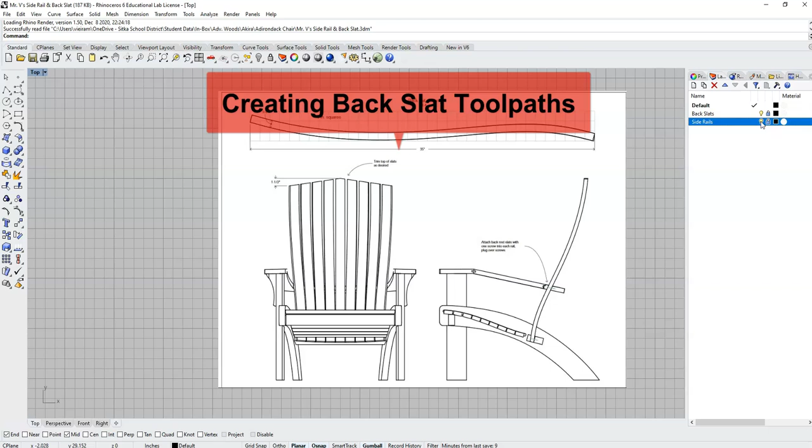Now that we have drafted the curves and vectors for our back slats, we need to export our back slat files to Aspire to set up the toolpaths to cut these on our CNC router. So we're going to make sure this is all joined together. If it's not, hit the join key.

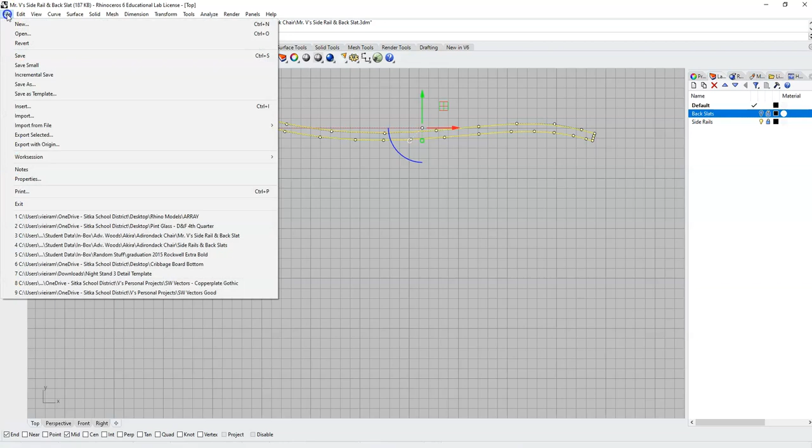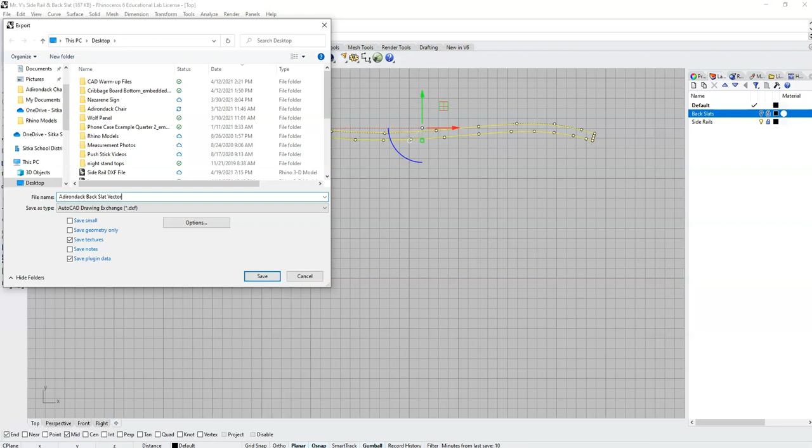And with it selected, we're going to go to our File menu and choose Export Selected. We're going to export this as an AutoCAD Drawing Exchange or .dxf file. I will name this Adirondack back slat vector, and I will save that file.

I'll say OK to all of the options on the dialog box, and with that done, I'm going to open Aspire. I'm going to create a new file. It's going to be single-sided. For our width, we're going to put in 40 inches. For our height, we're going to put in the width of our boards, which is 9.5 inches.

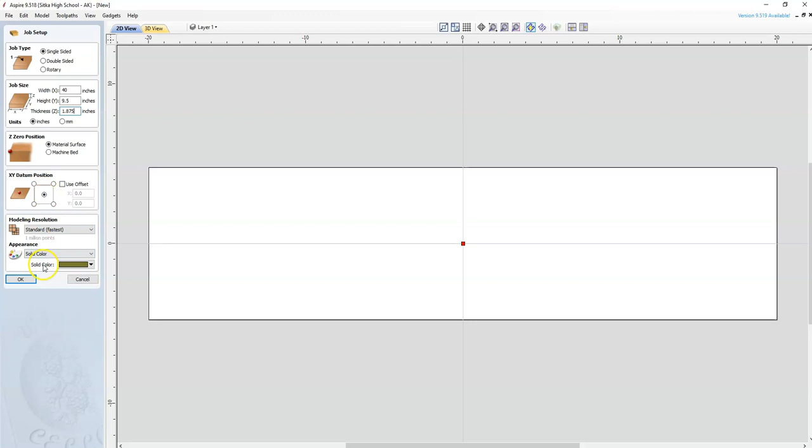And for our thickness, we're going to put in 1 7/8 of an inch, which is 1.875 inches. And we are going to zero from the surface, and our 0, 0 is going to be in the center. And I'll press OK. At this point, I'm going to go to my File menu. I'm going to import vectors, and I am going to find my Adirondack back slat vector file and open it.

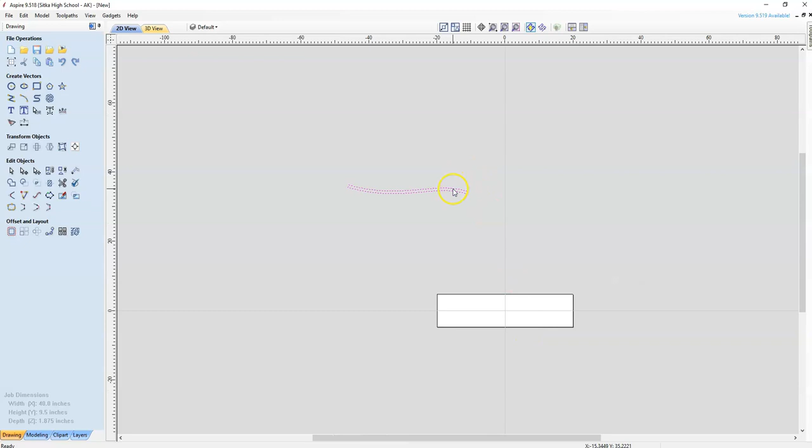And just like with our side rails, you need to zoom out to find your vector. Click on it once and you can drag this over and put it on your file here. So with this on our file, we now want to make as many copies of this as we can. So with it selected, I'm going to drag this, and with the Control key held down, I'm going to drag it and drop it.

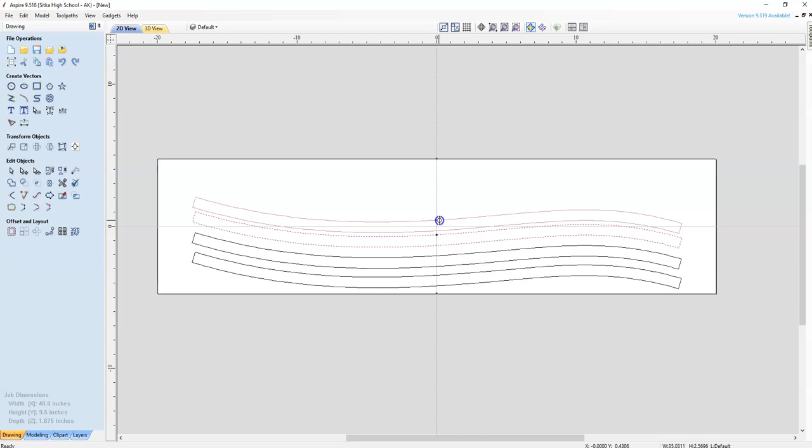And I'm leaving enough space that my bit can fit in here, in between the vectors. So I've got 1, 2, 3, 4, 5, and I don't know if I can fit 6. If I move this down a little bit, I don't think I'm going to be able to fit 6. So we're going to go with 5 of these. And we'll have to cut 2 of these eventually.

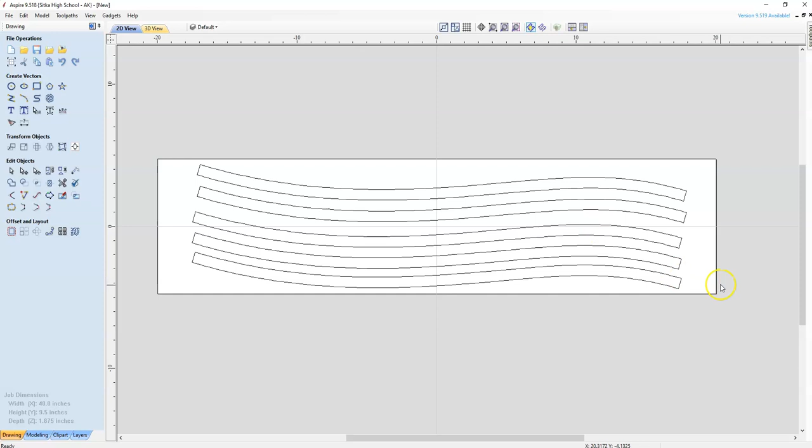So I'm going to spread this out a little bit now that I know I can only fit 5. Just make sure that I have the maximum space in between each one. See how that does. So with my vectors now, I'm going to select all of these. I'm going to click on my toolpath arrow and come over here. And in this case, we are only doing profile toolpaths. So we're going to select profile toolpath.

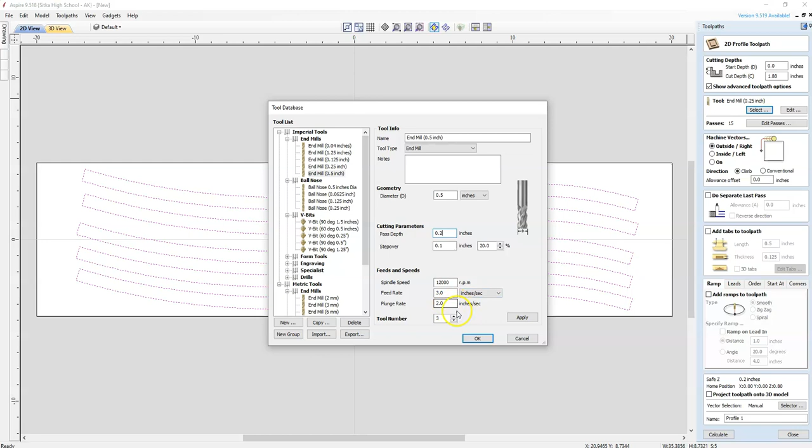Our start depth is 0. Our cut depth is going to be 1.88 inches. We're going to use a 1/2 inch end mill with a spindle speed of 12,000. Our pass depth will be 0.2 inches and a feed rate of 3 inches per second and a plunge rate of 2 inches per second. And I'll press OK.

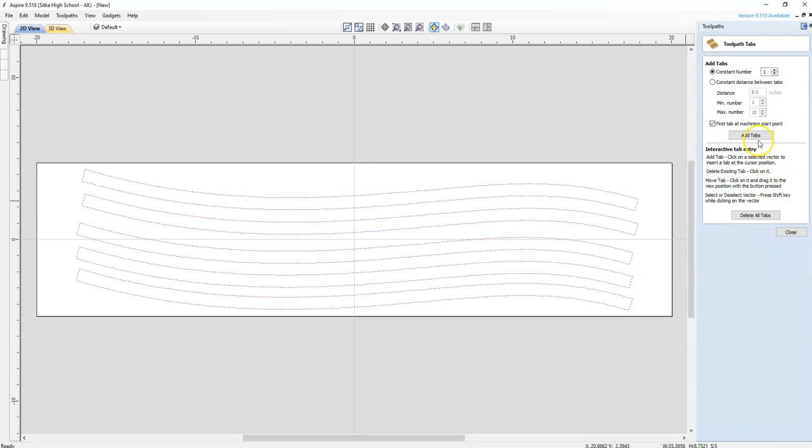With that done, I'm going to vector on the outside of this. I'm going to add tabs, 1/2 inch in length, and I'm going to go to a 1/4 inch in thickness. I'm going to edit tabs, and I'm going to add tabs. In this case, I want to move these tabs to places where they will be easy to sand off of my slats. So I'm going to try to put them right across from each other.

This one here in this corner I can just drag over. And I will try to line these up so they line up right across from each other, and I can just go down the line here and add these. And these tabs will keep the slats attached to the rest of the board as we cut these.

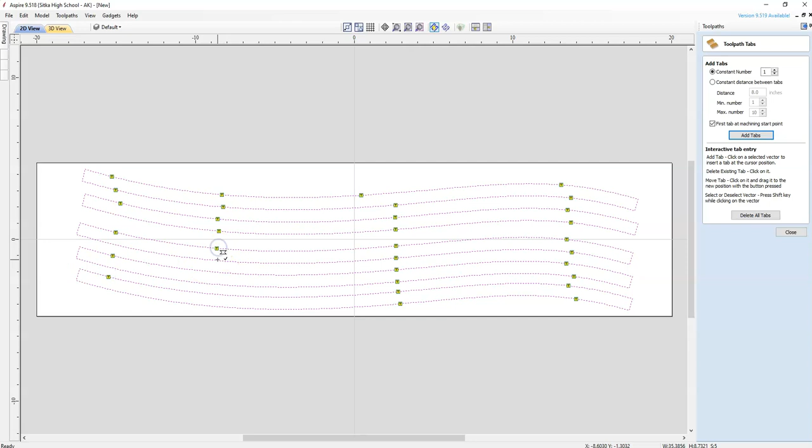Move these ones over here. And again, we don't want them at the corners because we want them in a place where it's going to be easy to sand them. And once I've got all these tabs in place, I'm going to hit close. I'm going to add a ramp, and my distance is going to be 1 inch.

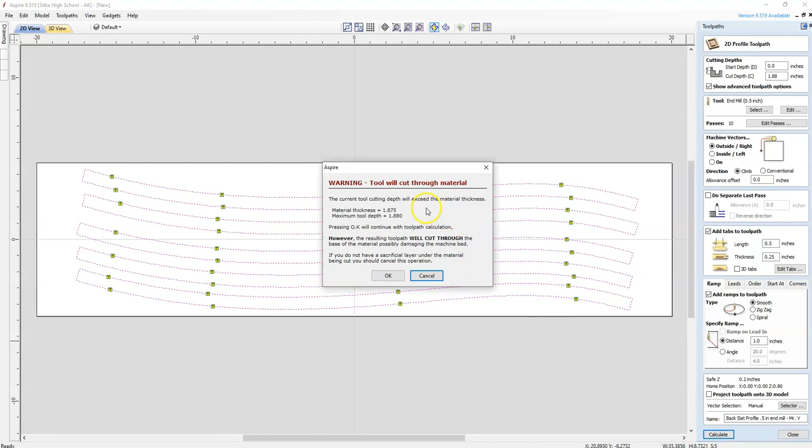And I'm going to call this back slat profile 0.5 inch end mill Mr. V. So put your name on there so I know it's your file. And then I'm going to calculate the file. This warning says that it's going to cut all the way through the board, which is good. That's what we want it to do. And then press OK.

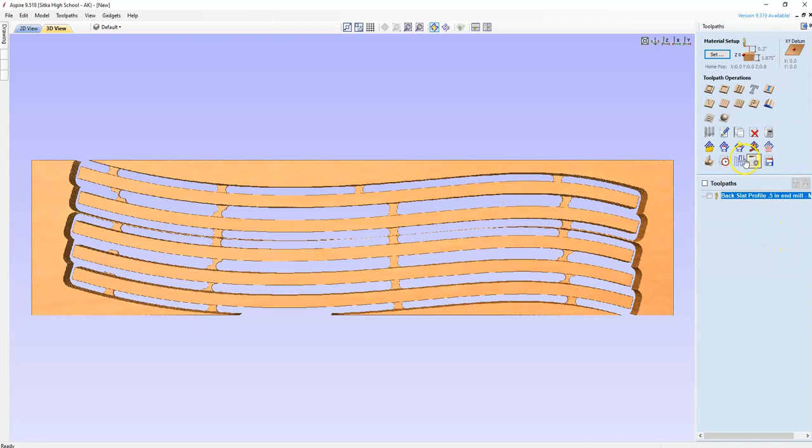And now I'm going to preview my toolpath. And you will see that we've got these tabs here that are connecting our pieces to each other so that when we cut these out, they don't go flying off the table. So with that, we are going to close this. We are going to save our toolpath.

Click on Save Toolpath. We're going to choose the centroid toolpath. And we want to use centroid inch. And we're going to save our toolpath. So I will keep my same name, centroid inch, and I'm going to save that toolpath. Once I have that toolpath saved, I have one more thing I have to do.

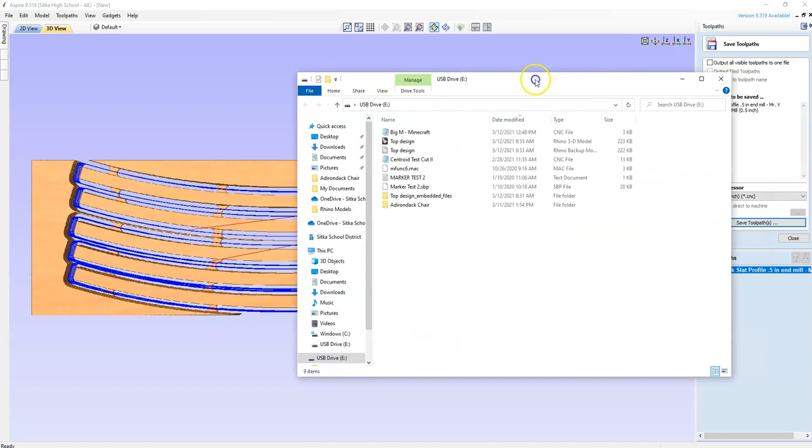I am going to find my profile toolpath that I just made. I'm going to open that up in Notepad. Come down to where you see it says Tool Change, and come right below that where you see a T command right there. And in front of that T3, I'm going to put a semicolon and a space.

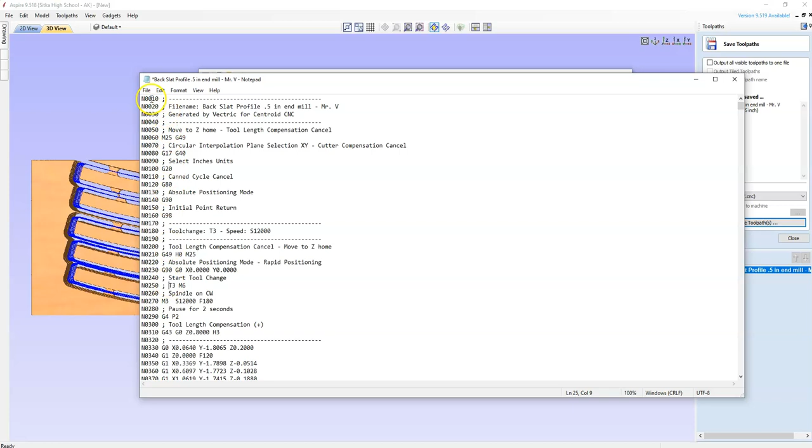And yours might say T1, T2, T3, T4. Whatever it says, you're going to put a semicolon and a space. Click File, resave that file. And now your toolpath is saved and ready to be put on a flash drive and taken to the CNC router to cut out your back slats.